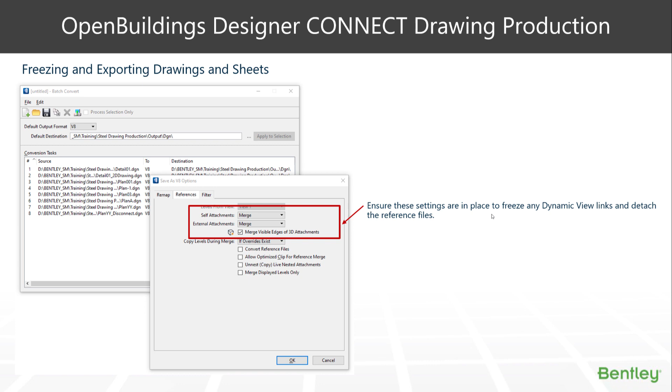There are times when we want to disconnect drawings from the 3D model itself and work on them in a 2D manual way. You'll notice here that we have our reference link back to the 3D model that the viewer's created. There are a number of ways that we can remove this link, but let's focus on the save as and export method, and then have a look at a bit of a batch process to do that as well.

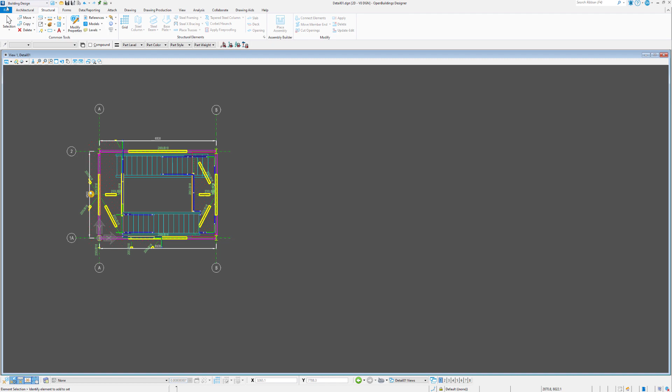The save as method and the export method have the ability to merge all this data into a single file. So if we were to go and look at our options area in the save as area, we have references. A couple of things we can do here, for the references, both self-attached and external attached, is we can choose merge. And just below that is the visible edge settings, so we can merge those visible edges in the 3D attachment.

And there are a few settings in here that we can look at to replace. So once those settings are in place, the merge and visible edges, we can give it a go, and we can say 2D drawing on the end of this file name and hit save.

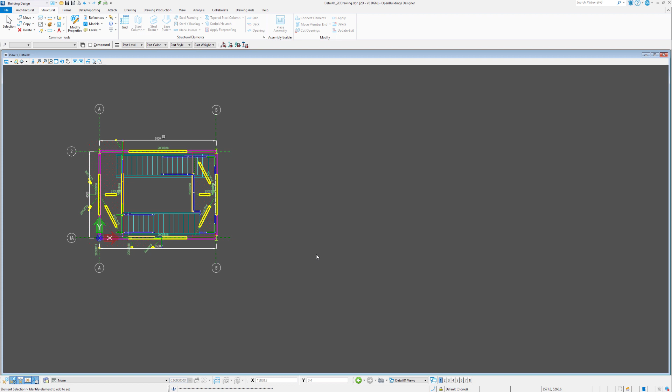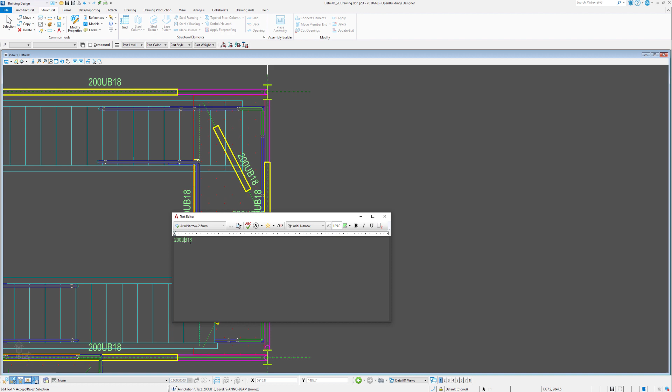And what that does from there is the first thing you'll notice is there are no references. It is just a straight merge of that geometry. And if we go and look at some of this geometry, it just becomes standard 2D behavior, so it means we can edit all this stuff and change things and edit text.

And use for this purpose. Another purpose you may want to deal with this too is for delivery. So at the other end, you may want to be able to deliver this out to a person. So let's have a look at how that may work.

So first of all, what we would like to do here is to create a new file, and that new file can be a sheet. So what we'll do is we'll browse to the Sheets folder and we'll just make sure we choose a seed file that has a sheet. We have a sheet seed ISO here, and we can go in and give it our sheet number. Now in this case it's a detail, but we may just name it sheet 001 and hit save.

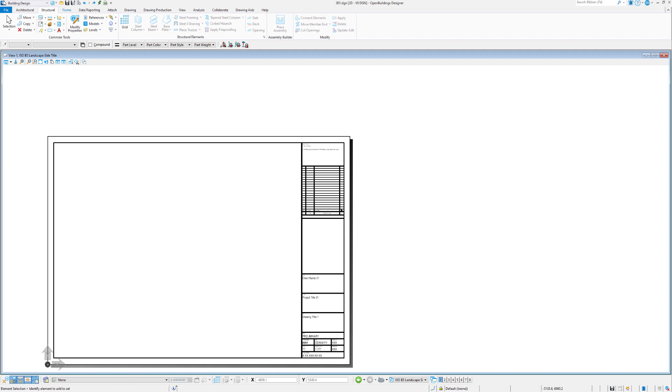So what we might have here is the first thing to check is in the models dialog box. This delivered sheet has a number of different models depending on the size you want to represent your drawings at. So let's say we removed the ones we don't want, which is fine, and we're left with this. We'll just remove the final one here.

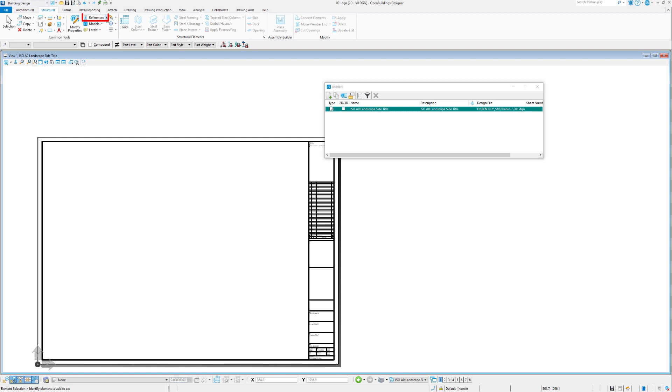Okay, so we want to bring our detail into the sheet, and you can do this with any different drawings you want to bring into the sheet, maybe multiple drawings as well. We can use our references dialog box for that purpose, and bring in from our drawing model, the detail 01.

Now remember, back to this diagram, this is how we may set up our models right through to the sheet model. It's not the only way of doing it, but it's certainly one of the ways. So typically when we reference in our detail, we need to go back to the drawing model, back to the assembly, and back to the sub. In this case, it's a live nesting of 3.

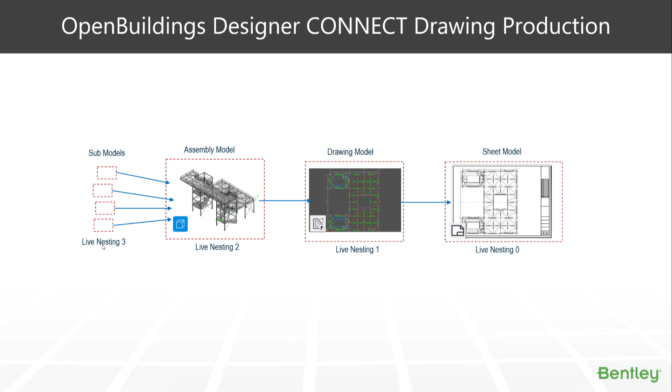So therefore we've got detail 01, we can pop in there live nesting, and we can put in a value of 3.

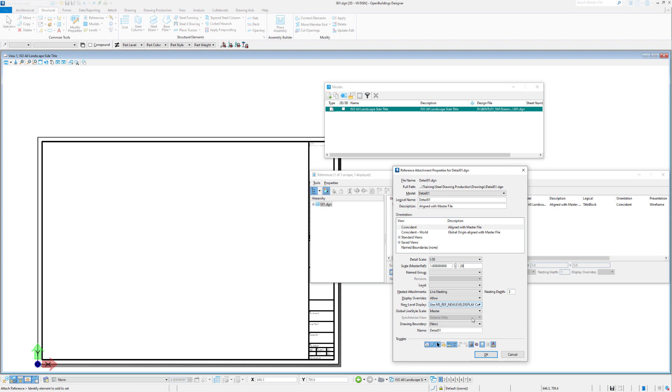And what we'll do for the purposes of this exercise, the sheet here will be the sheet's full size. So if we want to be putting this detail on this sheet, we need to give it a scale. In this case, it may be, and you may need to change this, but we'll try a scale of 1 to 20, and we hit OK. And there is our detail down in the corner.

You can either move the detail by right-clicking on the reference and saying Move, or alternatively, you can use this button in the Models area and move the sheet to suit as well. And there's our title block information over there, so we just move that back into position. So two methods there as well.

And if we want to send this as a flattened file out to someone we need to distribute to, again, we can do the same thing. We can say File, Save As, and then just make sure in the options all this information is merged in together.

Now there may be a need or a time when you want to create a batch process out of this. So there is a feature in a tool called Batch Converter. What we could do is use the batch converter to perform the same function on many files. So if we want to do it all to our drawing models, we could simply add all the drawing models that we have in our drawings folder.

And what it is asking us for is a default destination, so we can browse to a place where we would like this to live. On top of that, we could also have the various formats that we could look to export to as well. It could be V8i, which is what we're currently working in today, or it could be DWG, or a bunch of other formats that we have listed in the batch process.

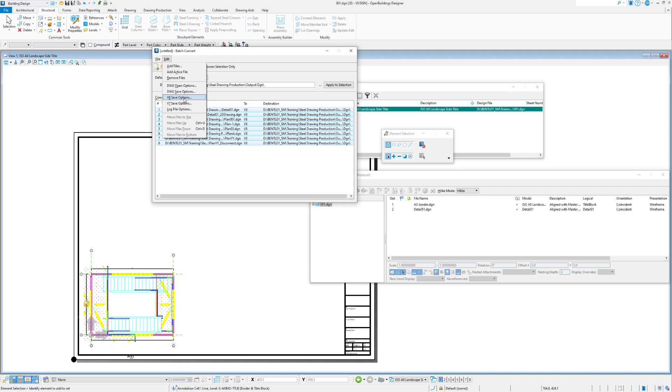Finally, what we can do is select all our drawings and say Edit V8 Save Options. You'll also notice in the DWG Save Options, we have that same ability with the merging of all the references and the merge visible edges of 3D attachments. But for this purpose, we'll look at the V8 Save Options, and again we have the same options here, Merge, and merge visible edges of 3D attachments.

Okay, so once we're happy with our settings that we've altered, we can say Apply to Selection and then hit the Process button to process this job. And it will spit out those files to the folders that we've specified.